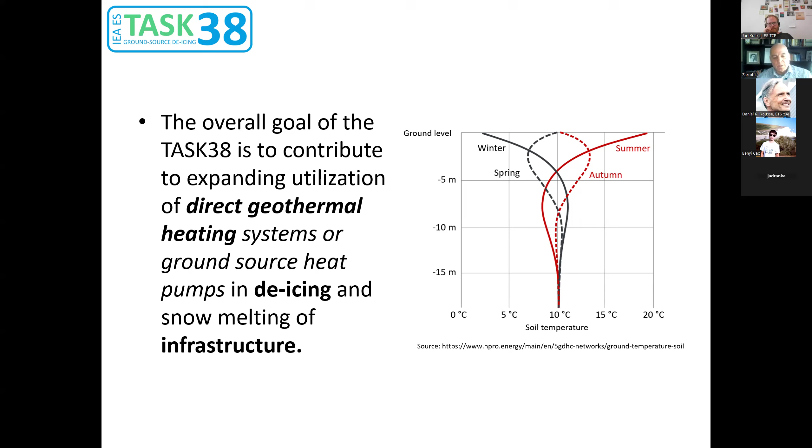The motivation: as you know, there are a number of these systems in all countries, but generally they have been heated by electricity, by electric cables. The intention and main goal of this annex was a transition from electricity to renewable heat by using the hydronic pavement system. This hydronic system you maybe have in your home also, in your bathroom or in the kitchen; some heating systems are based on hydronic heating.

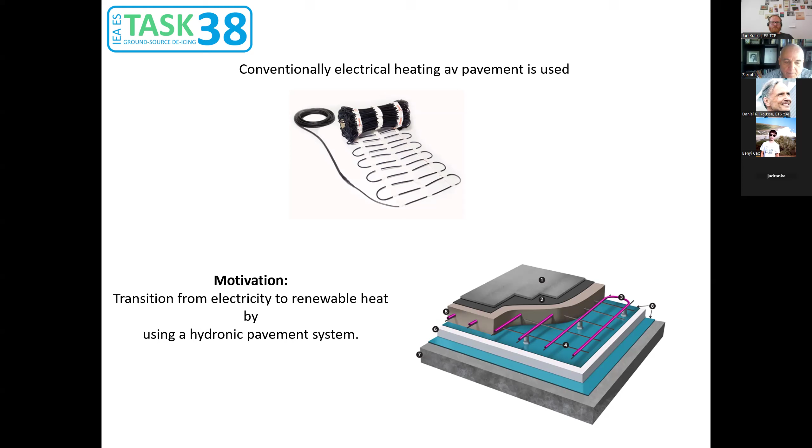And you have two alternatives, the electrical cables that you see up there, or circulating warm water in the floor. It's the same technique, but when we are going out to pedestrian or parking areas and so on, the demands for mechanical pressure change. What we are focusing on is using a hydronic pavement and using renewable energy, especially from

the ground. However, what is more interesting in this case, which is not so usual, people have not used it so much, is that the pavement itself, let me choose a good pointer, the pavement itself, here a piece of road, could be any kind of surface exposed to solar radiation outside. The flooring at home is not exposed to the sun. You can use this surface outside the house as a kind of solar collector.

What it means is that when they become hot, with your hydronic pavement the temperature in these pipes is higher than the ground, and you can send this harvested energy to the ground to increase its temperature. And when we have this kind of harvesting, you need a kind of storage. You should save it somewhere in order to use it during the winter, which means we have seasonal storage capacity here also.

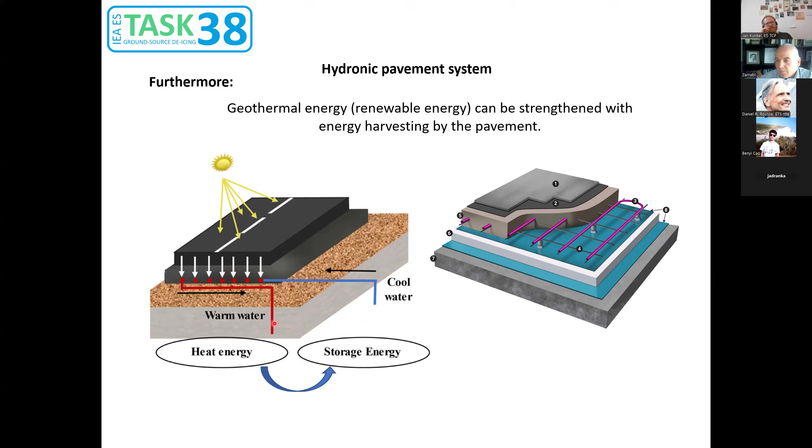It is the major deviation from floor heating in housing, that we are using the surface of the pavement as the solar collector. And then we are talking about the storage. The type of storage depends on where you are, what geological conditions you have, or what the budget of the project is. But you have the typical energy storage types: borehole, TTES, which is tank storage, pit storage, or aquifer.

Don't forget that this system also could be used and has been used in rural areas. Thermal storage is especially when you are outside of the cities, maybe in the vicinity of the cities. But if you have a district heating system in your country, then you can use the return temperature of the district heating system in order to heat up your roads or your pavements.

That we have done in Sweden on a kind of highway; we have done it with return temperature. It's a highway that they are heating up, and it has been used because the slope of the road is too much and all lorries stop there. During the winter, we have a huge problem with traffic and congestion of the road.

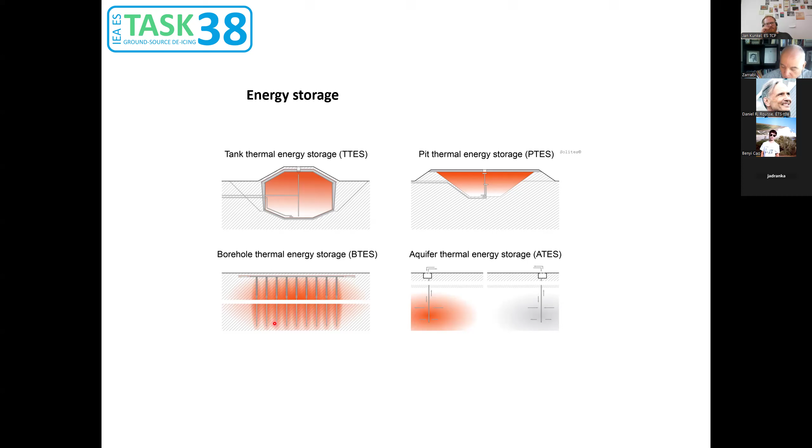Okay, we have all of this. We have our systems, and what we want to do is almost something like this. It's a kind of prototype that we have done in Sweden in order to show our public road administrator that it is possible to do. And you see here that we have different components. This area that I am pointing to now is the hydronic pavement. And the blue area is our reference area, where we are looking at what happens if we have the hydronic pavement and if we don't have hydronic pavement.

Furthermore, you see that we used boreholes because the geological condition in Sweden is very suitable for boreholes. We used 4 boreholes. We have a service building and we have a weather station. And finally, we have sensors giving us signals when it is cold or when we should start the system, because controlling the system is very important. It is the whole system that we have worked with.

And then we have some cases in the world where they have used almost the same system, the same components. It is not so unique, but in order to validate that and to learn how you should control it, you should do this kind of prototype to find out what the challenges are. Then I hope that you are now familiar with the system that I'm going to talk about.

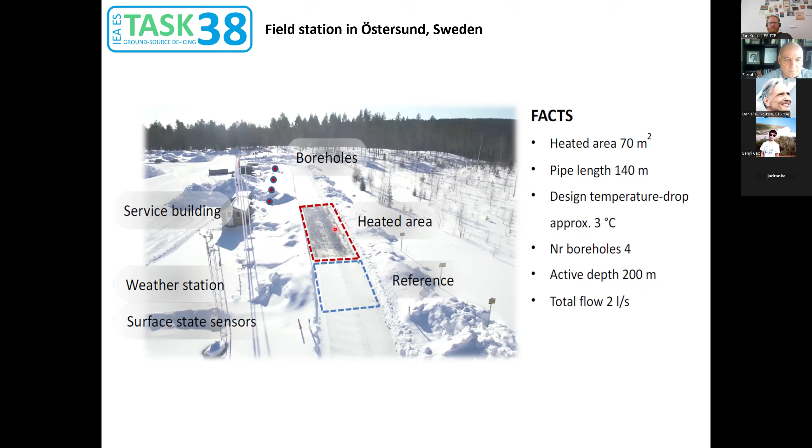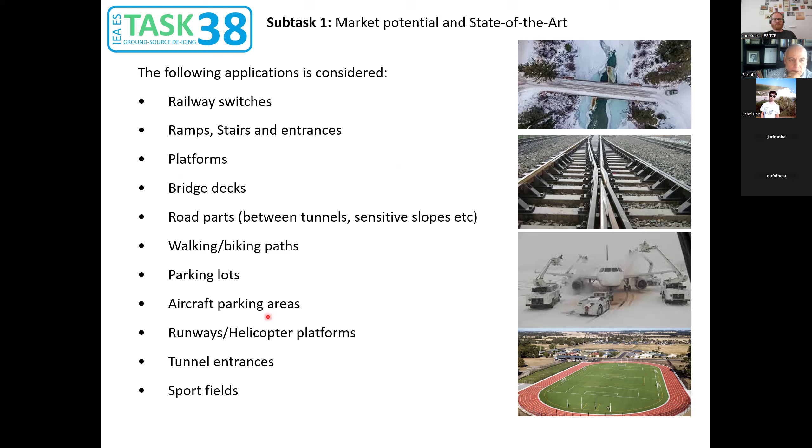If you need de-icing for increasing mobility, or not getting injured, or not getting damage to your devices, then you are going to use a kind of heated pavement. And we have all these applications in our state of the art in different countries. I tried to find out how many countries have used it. The number started to increase, and I said, okay, maybe it's not feasible to do that.

And if you look at this picture, you see that we are looking at de-icing. As I mentioned, these systems can be used for another purpose also, and it's for warm climate, not cold climate. It's for getting rid of the urban heat island, if you can reduce the pavement temperature, because, as we said, we can use it as a solar collector. Sometimes if you have a black surface, you can get temperatures above 80, 85.

And in some countries where the temperature is higher, they are getting softening of the asphalt. That is another damage. Then by using this kind of system in a hot climate, you can reduce the urban heat island and furthermore increase the lifetime of your pavement.

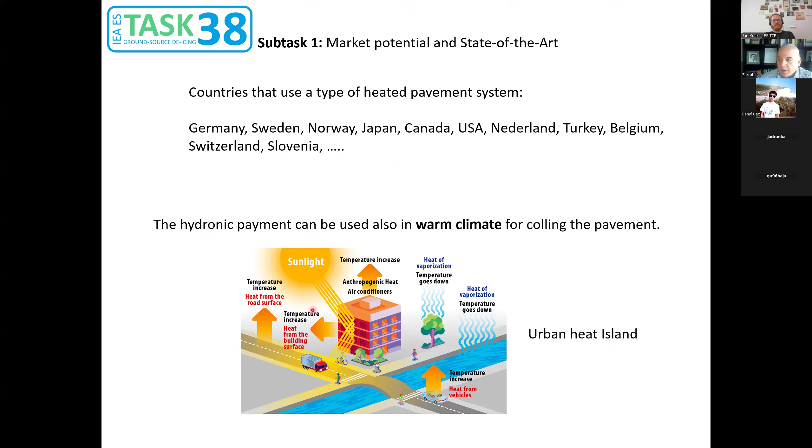It is another application, and you can use that energy that you are harvesting, which is much more than the cold climates, and then use it for winter in order to heat the space heating or something that you need to heat up. Then the system has two sides, but we are focusing on the de-icing because it's one of our challenges in Nordic countries and in the cold part of the other countries.

But if you want to evaporate everything, then you need 5 degrees, which means that by increasing the temperature, you should pump out more heat to the surface, and your supply temperature from the hydronic system increases. But roughly, no matter what you want to do, it's somewhere between 20 to 250 watts per square meter.

And in the beginning, it seems that, oh, it's too much because the price of the energy is high. Yes, it is. I can tell you that in the United States, they are using electrical cables, and some people believe that it's a kind of luxury to have it in front of the malls and markets. But it is what we are trying to do, to use harvested energy. We are not using electricity.

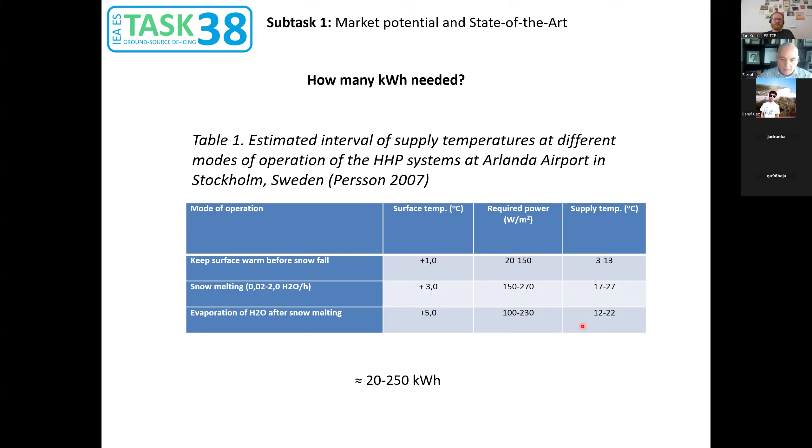Then what I have here is a kind of indication that this system has been used in Arlanda Airport in Stockholm. And they are showing what they need for de-icing the parking of the airplanes, and what they get with harvesting. And you see, I have a lot of energy. Yes, you have, but you are losing a little bit because of the seasonal storage. But anyway, you can manage to get all the energy that you need by harvesting energy from the surface.

And still, I can mention that in Sweden, at least in Sweden, we have 640,000 square meters that have been heated by cables. The energy that you need is the same. It's around 200 kilowatt hours per square meter. You are paying for that. It is what we are going to tell you: okay, you don't need to pay for that. You can do it by harvesting energy.

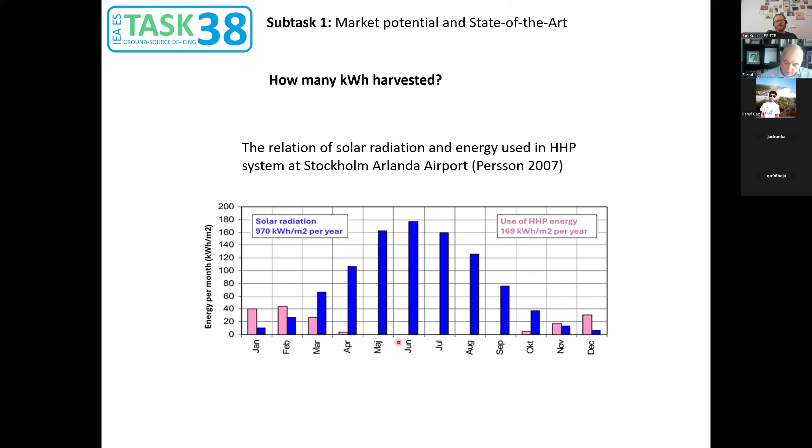And it's very impressive that they are using it more and more. It is what I want to tell you. It's an increasing market, and they are using it, and they are trying to optimize. They are trying to use different types of energy, especially heat, in different forms. I mean that if you are close to industry, if you have computer servers enclosed, then you can use all types of heat and combine them in a hydronic system. It's not dependent on the heat source.

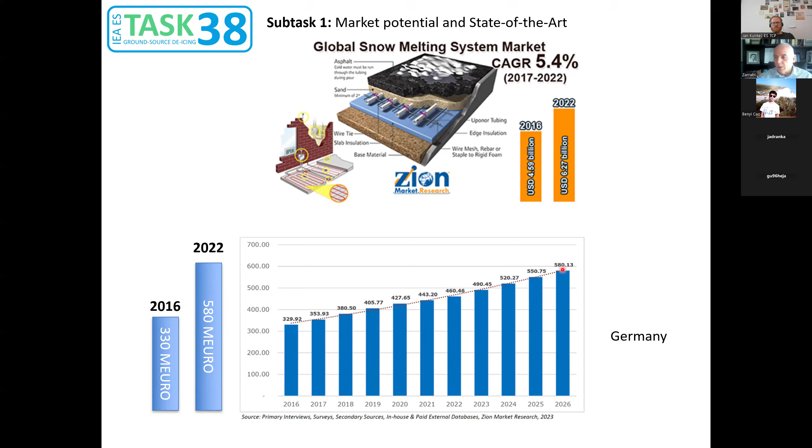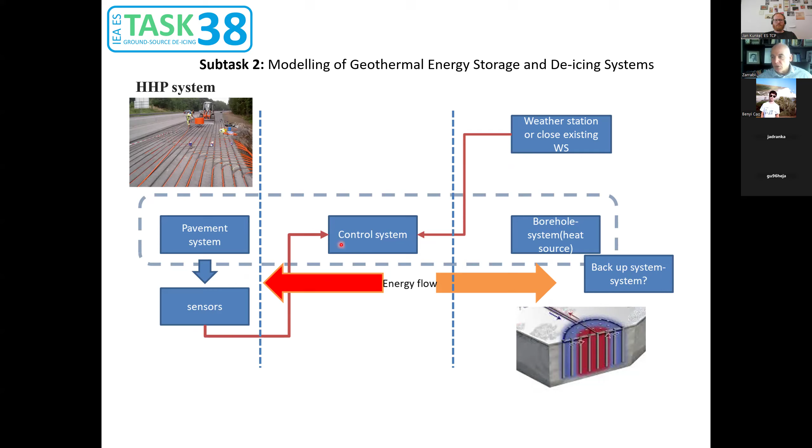Some companies also have already done everything - they do your calculation, design your system, and so on. They exist in Germany and other countries. They have a number of names you can find in our report. I don't want to mention any company now.

The challenge generally is how you should treat the surface temperature, because you want to know what the surface temperature is in order to send your heat to the surface. This surface temperature is so complicated because it's influenced by a number of outside climate parameters.

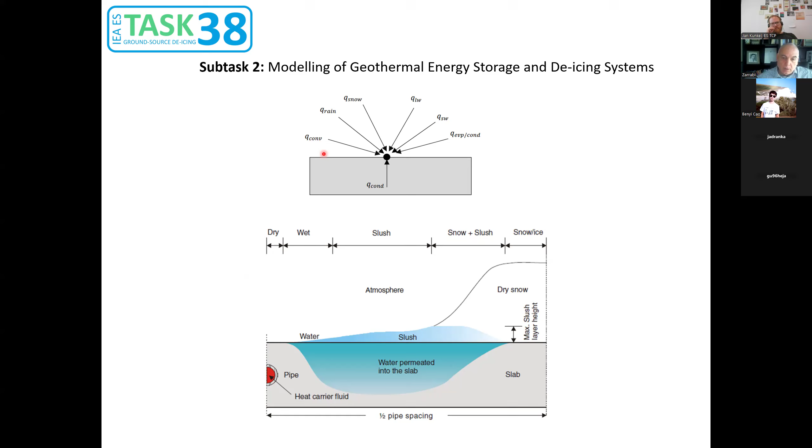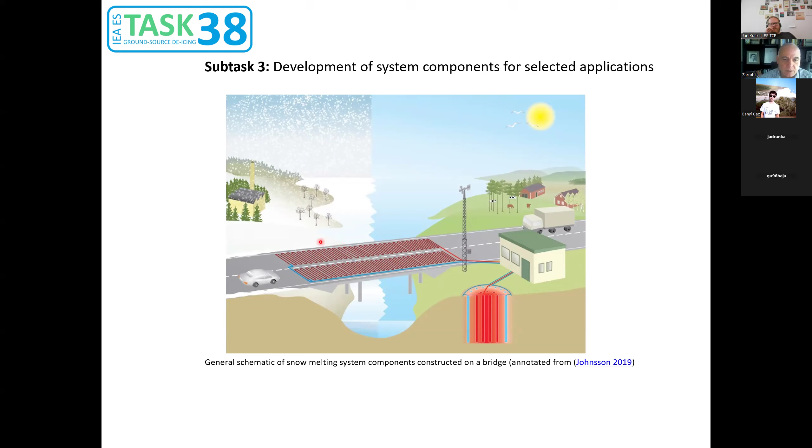I think it's possible, but we have other kinds of problems, because if you increase or decrease this, then you get another phenomenon, another type of condition. It's good for heat transfer, but maybe you're going to get more ice formation because the surface has low thermal capacity.

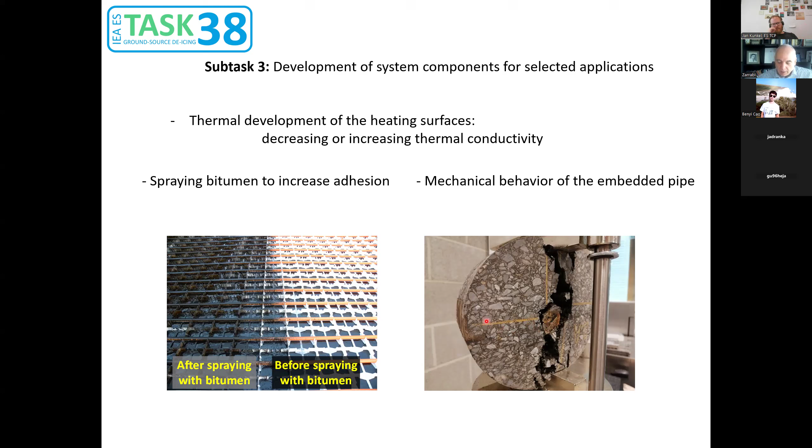But what we've done in our prototype road is that we never had anything like this—we just put it beneath the asphalt after compaction. But this kind of development means each system could be improved in a better way. I've seen that in one country they've produced prefabricated systems, meaning the pipes are inside, the pavement is there, and they couple the pipes together.

And it is a kind of prefabricated hydronic pavements.

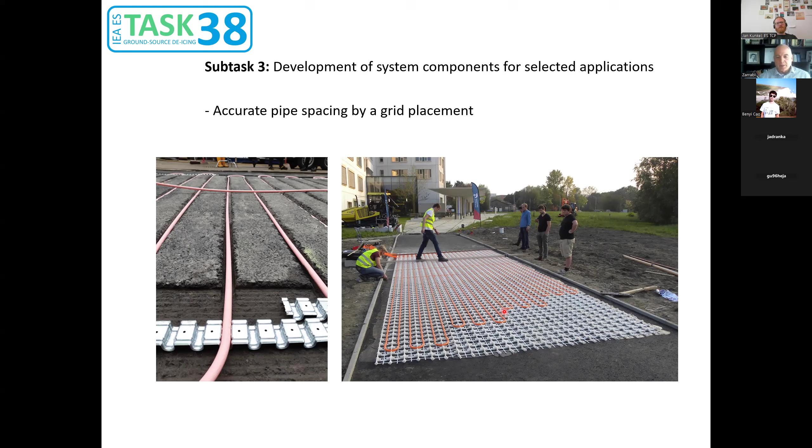Furthermore, we have looked at the distance of the piping from the surface and between them. It's very obvious that if the distance is high, then the temperature is high - the distance between pipes, or the distance to the surface. Finding out what is good and optimizing that is another development that could be done concerning the pipe material, how good it is, because the pipe itself is plastic. It's going to show a kind of resistance that we don't like when we are sending the heat to the surface.

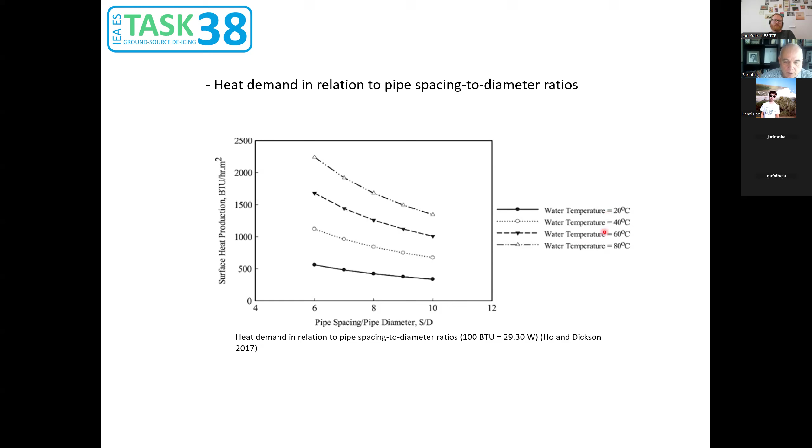So I believe the time is running. Then I am showing work package 4.

In work package 4, what we have tried to do is look at all the state of the art that people talked about, what they have. We have tried to map them to see.

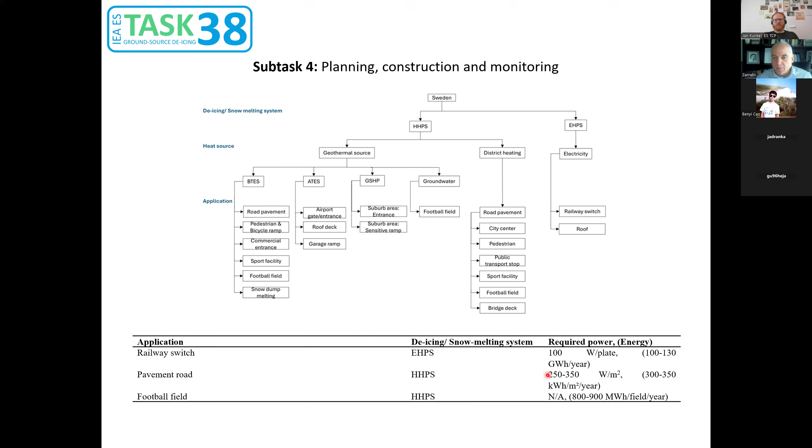What we have done in Östersund in Sweden, we get the most cold area that we could have in Sweden. The worst case is that we always have a snow of a number of meters, and then we try to get rid of that.

Then Subtask 4 has tried to give design guidelines - sometimes using design guidelines from the companies doing this, like how you should do the piping, what is good, what is bad, what are the distances, should you do the insulation below the substrate or not.

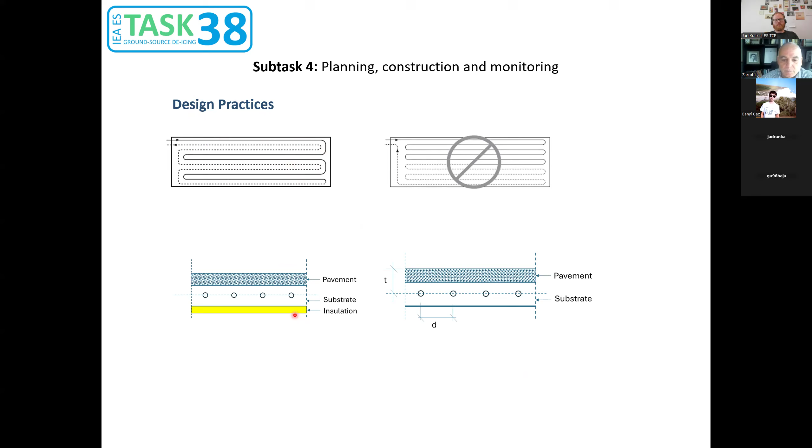And furthermore, we have tried to give some kind of suggestion on how you should control the system, comparing the surface temperature versus the outdoor temperature. You can have these kinds of set points, so that when the temperature is below something, you can decide that your system starts sending heat to the surface. This could vary, but it's what we have seen used in many cases.

If you look here, the outdoor temperature is -8, and the supply temperature set point is 10. Then after that, you can reduce that.

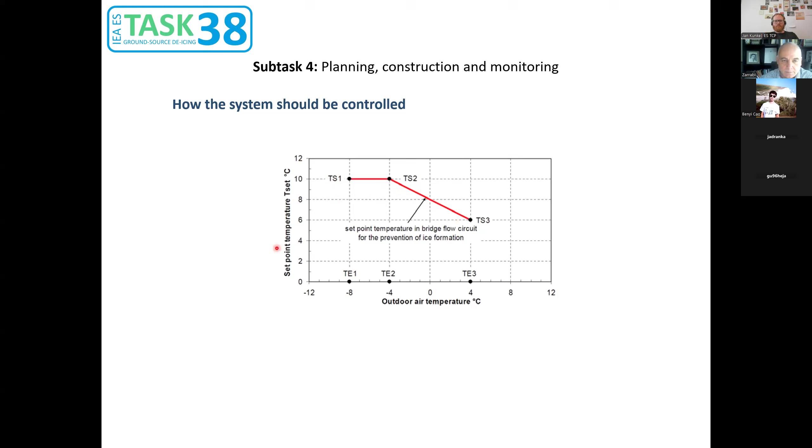And finally, we have given some kind of construction practice - if you look here, our system, how they should do it, and our storage. We are showing again how you can use this additional substrate to have the piping and sensoring. Our recommendation, or rather informational suggestion, is that you need these sensors in order to control the system.

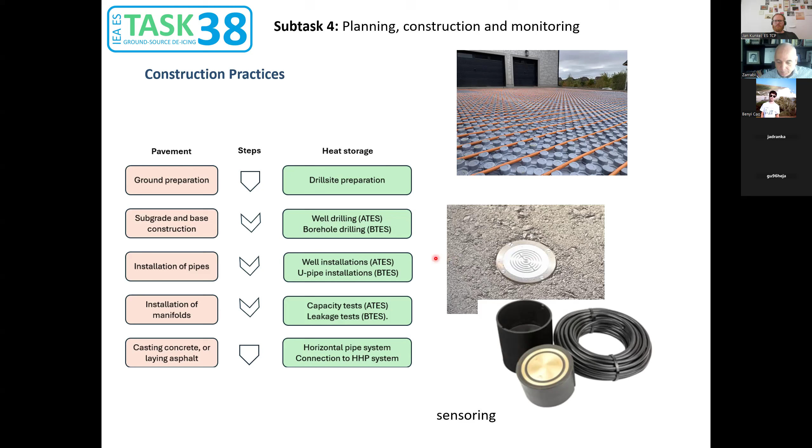Finally, I believe in subtask 4.3, we are giving recommendations to the market and technology on how we can develop these systems in order to make the transition. You see that this picture is from France - it's a real case that they are using.

I can mention that as an unsuccessful case. Also, not this one. They have another one that they call Power Road. It's from the same project, but they had another idea somewhere that didn't work. They used real solar panels on the surface of the asphalt, and it was not so successful, because they have tried to do a number of things. If you look at the reports, you can see that there are a number of systems and innovations that people have tried to do.

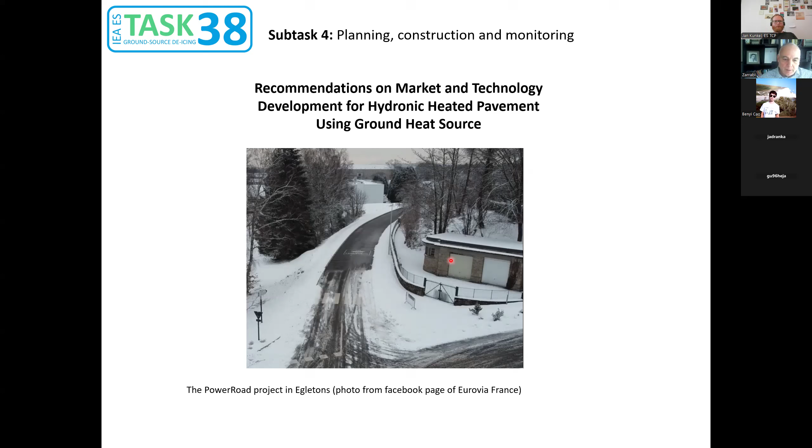And I believe that's my last picture. Thank you for your attention, and I'm ready to answer if there are any questions.

Thank you. So my first and, to be honest, only question that came up, because it's very clear actually. I saw that in your list of examples you had tunnel entrances. And I was wondering, why? What's the problem there? Yeah, the problem with tunnels is that you are changing the lighting. You have the light before, and then you're entering the tunnel, and the deviation there is so big that they have seen a number of accidents happen at the entrance of the tunnels. Because of that, in addition to the lighting there is the road condition, entering from an icy or snowy condition to a non-snowy one because there is no snow.

When we are talking about tunnels, you can think about bridges also. For bridges, you have cold climate on both sides, while for a road, below is the ground. There the risk of ice formation is higher, but people working with traffic safety are saying: okay, if you are going from a snowy icy condition onto a bridge which is heated, fair enough, good, but these boundaries create another kind of problem for the driver. It's not big, but changing the condition for a very short time is going to create problems. It will always be a problem. All right, that makes sense.

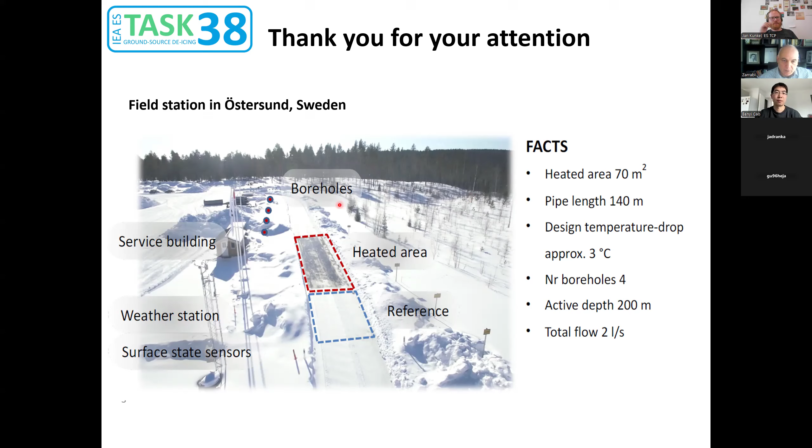But for me, as I mentioned, we have worked with the subject for a long time, from 2012, for years. We have collaborated with different road administrators. But what popped up, that I showed you in one of the pictures, is this paper, which I like very much. I can show you that one. This one, the injury reducing effect. It's very good because they can calculate how much you can gain. Yeah, and I think that's just something you easily forget. This effect, you don't really think about it because you're thinking so technically.

Especially for elderly people, because during the winter they don't go out as they are afraid of becoming injured. What happens is that the life quality of this group in society is going to increase. They will dare to go out. As engineers we are just focusing on engineering: pipe distances, pipe materials, heat capacity here and there. When I came in contact with this guy, I said, "Oh my God, we forget a huge social problem." It is costly for society when people become injured, no matter the age. But that they dare to come out during winter is another issue you are improving. It's a big social life quality effect.

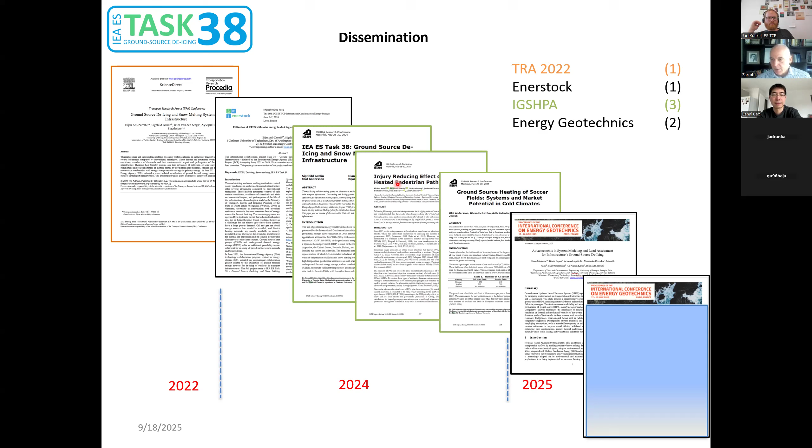You don't need to change it, because otherwise the asphalt is damaged by heat expansion and contraction, and you are going to get cracks and so on. These are the advantages that you can get, but still, your concern is correct.